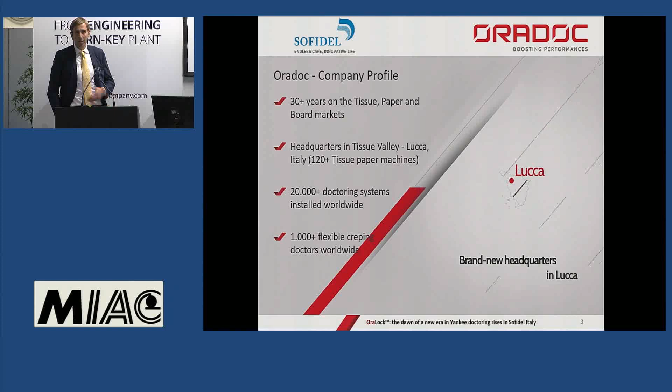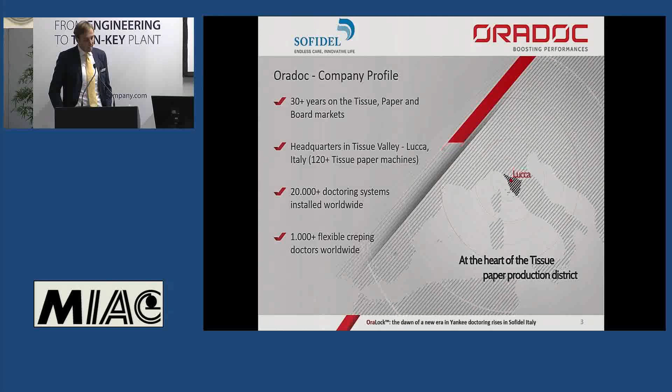Before starting, some brief information about our organization. ORADOC is part of WIVA Network, which involves two other companies, CRC and ISE, that are involved in the paper industry, providing products and services for more than 25 years. Both of these companies are based here in Lucca. Concerning ORADOC, it is headquartered nowadays in Lucca, but we also have a branch office in the north of Italy, in Novara.

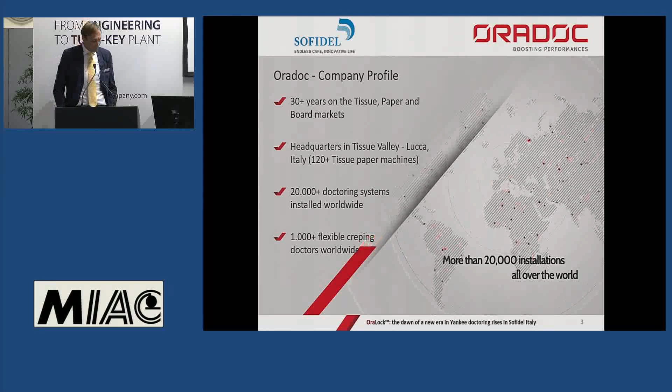For over 30 years we have represented a benchmark in the world of doctors, measuring systems, and blades for end user and OEM customers. Even though our background came from the paper industry, in the last few years we have developed and grown also in other fields like rubber, nonwovens, wood industry, and others.

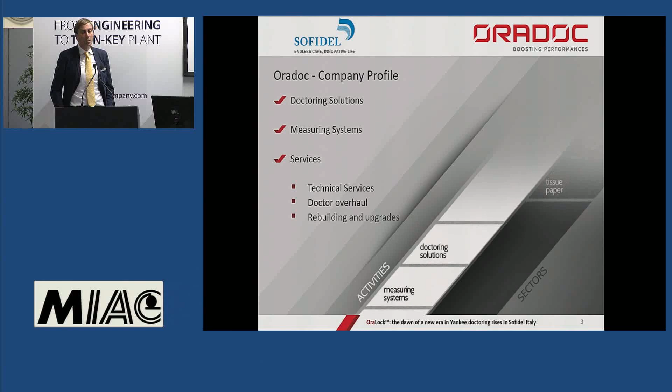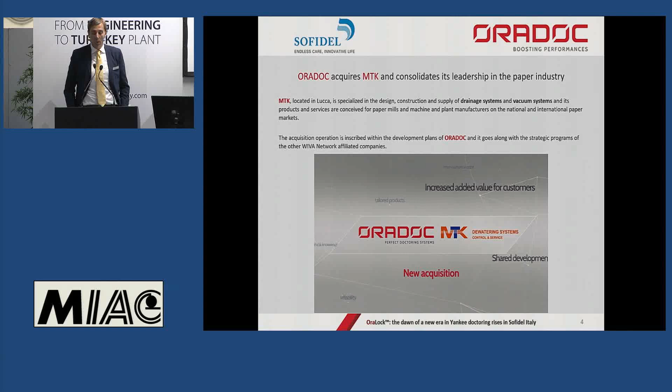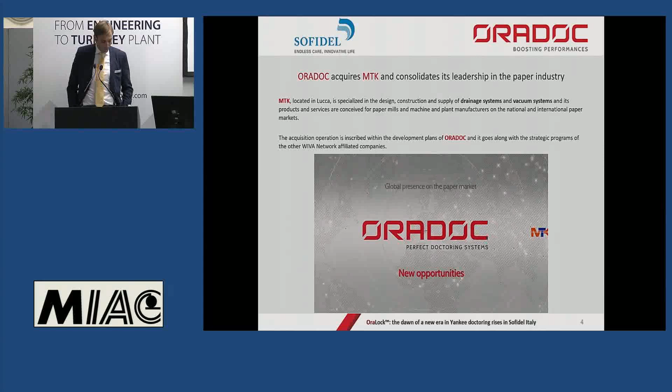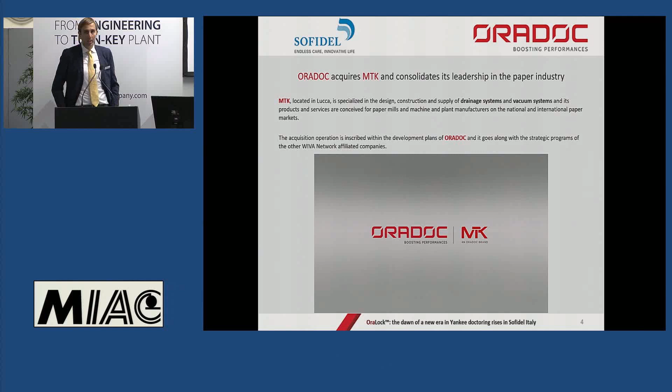This is the great news for this year about ORADOC: from the 1st of January 2021, we have acquired MTK. MTK is also an Italian company, based in Lucca, that produces and installs drainage systems and related vacuum systems for the paper industry. This acquisition is part of the strategy that we have in ORADOC for the present and for the future.

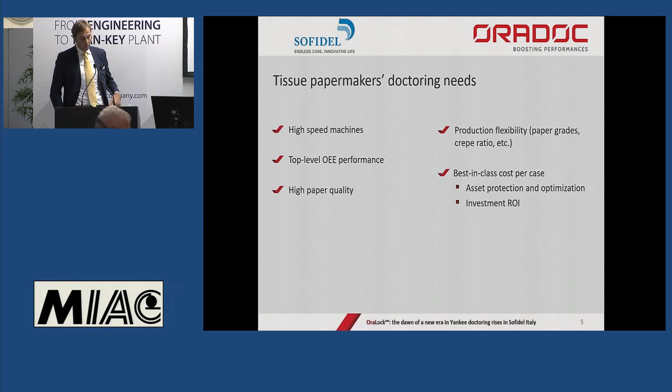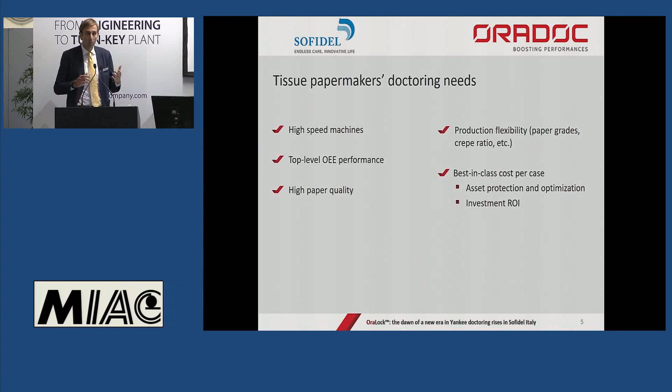Okay, let's discuss the OraLock after this brief presentation. As you know, paper makers are more or less every day challenged by the need to obtain the best possible product in terms of quality and quantity, while using high-speed machines and also differentiating the product every day according to market demand.

All of these needs cannot be achieved without a stable, flexible, and optimized creping process. The creping process is a part of the process where the creping blade holder and the other holders of the Yankee cylinder are very important.

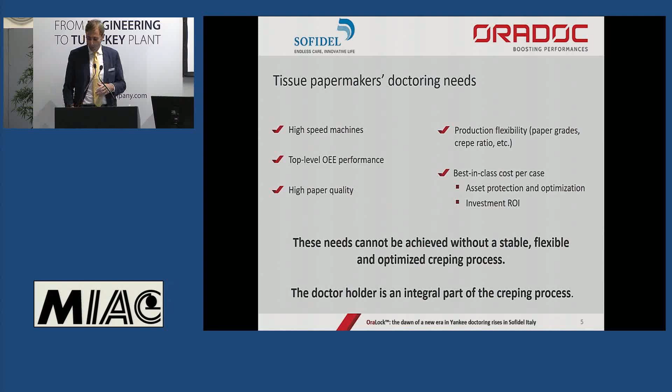So, when it comes to meeting this need, in the market we can find two different concepts of creping blade Yankee doctors: the flexible philosophy and the rigid concept.

Historically, ORADOC has always trusted the flexible concept, but our idea was to approach the rigid concept from the beginning, with some advantages over the already existing doctor. This is what we have done with this project.

This project came from our experience in the paper market and in paper mills, but also thanks to the help that our customers gave to us.

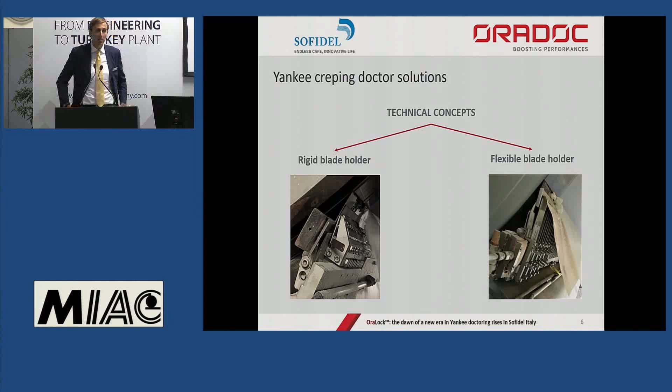The development process of this OraLock, this new doctor, came from a dedicated SWOT analysis that we performed on the existing rigid doctors found on the market.

So, starting from the strengths: we could say that what we find in the market has a robust, reliable design, and of course a cartridge system to adjust the stick-out blade.

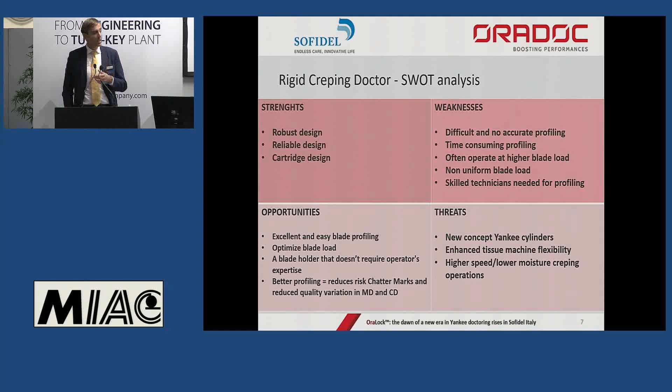On the other hand, if we look at the weaknesses of this rigid creping doctor, we could list: difficult and non-accurate profiling. For this reason, this procedure is usually carried out by a very skilled technician and also takes time. But if you don't do a very good profiling, you end up with a higher blade load in order to cover the Yankee better, and a non-uniform blade load.

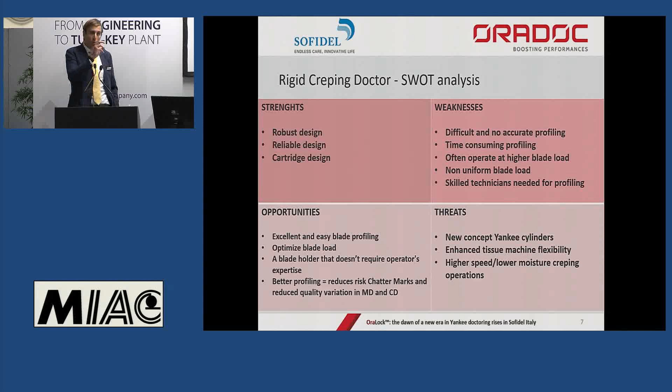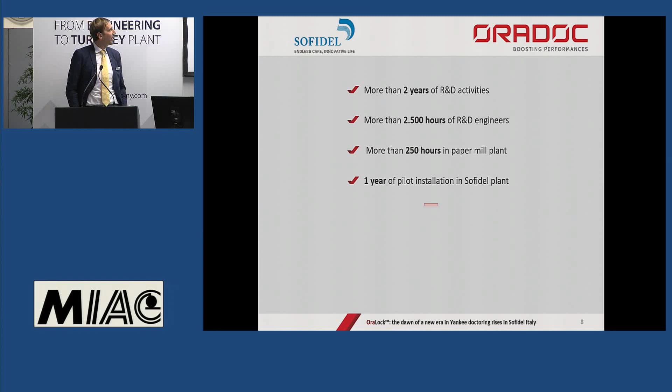For this reason, we took all these weaknesses and tried to address them in our new concept. So, following this idea, after more than 2 years of R&D activities and 1 year of pilot installation in a Sofidel plant, we have developed the new concept, with the brand name OraLock.

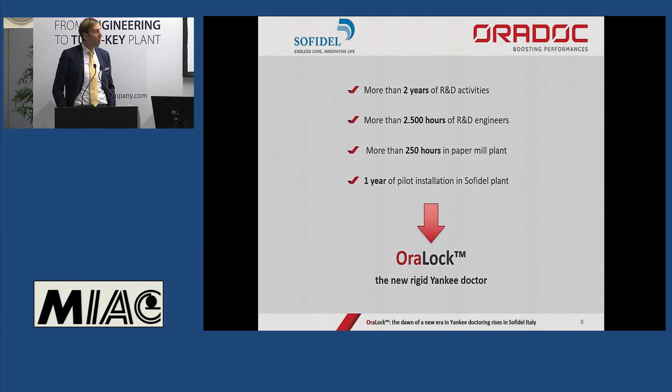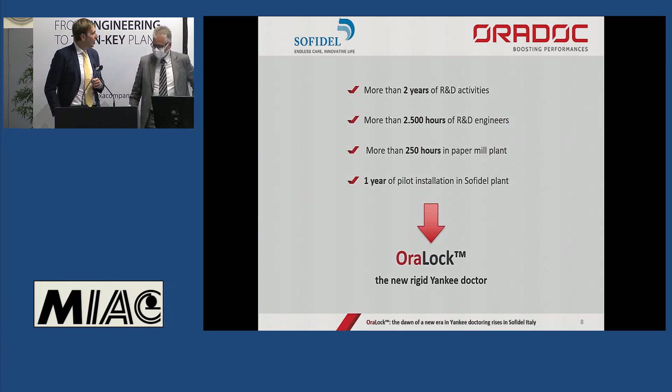So I now give the floor to Francesco Corrotti. Again, thank you for sharing the presentation with us. We will briefly explain the Sofidel group, if necessary, and also how we have approached this project together.

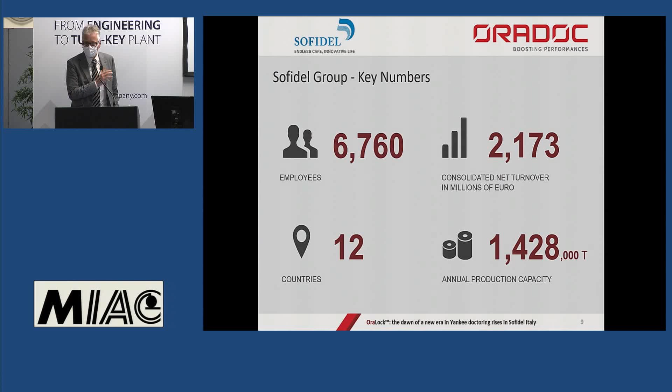Okay, just before getting into the point of this presentation, please allow me to get you bored for a couple of minutes about presenting my company, Sofidel Group.

Just a few numbers to describe. Maybe Sofidel is well known in the area and maybe in Europe, a little bit less outside Europe. However, key numbers: more than 6,000 employees, with a consolidated net turnover of over 2 billion. We have facilities in 12 countries, with an annual production capacity of our paper mills of about 1.5 million at the moment.

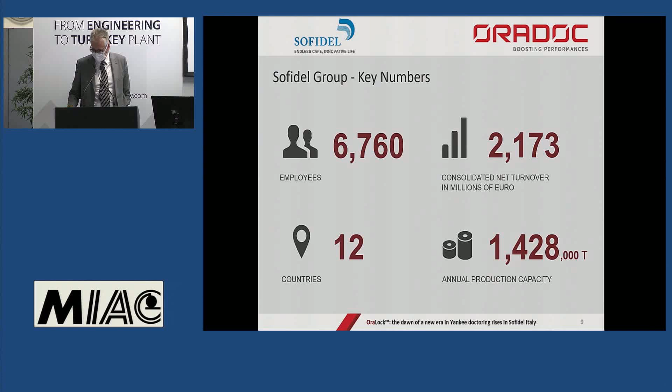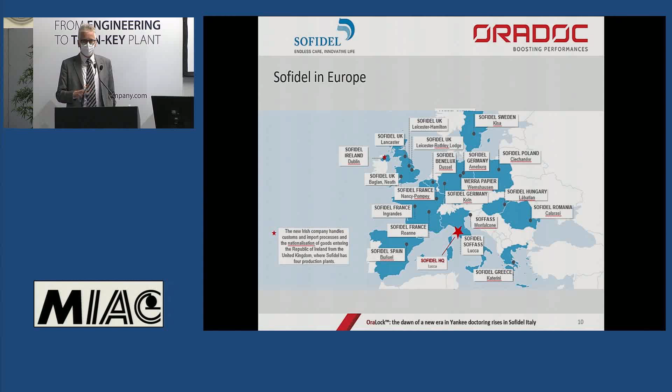The story of Sofidel is quite young, because it's a company that was founded about 50 years ago. But in these 50 years we have seen continuous growth from Italy, consolidating in the Italian market, with the creation of the Regina brand in the late 80s, and after that the challenge of expansion in Europe via greenfields and via acquisitions.

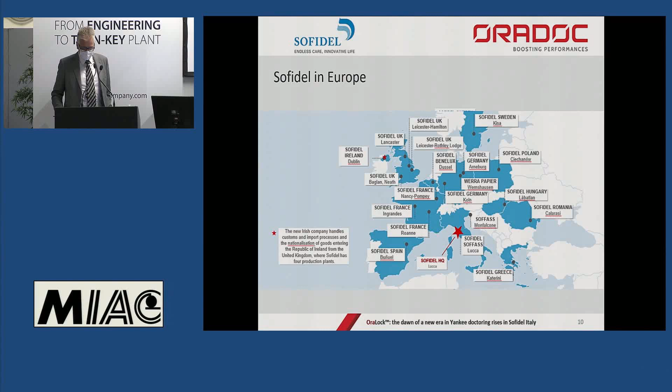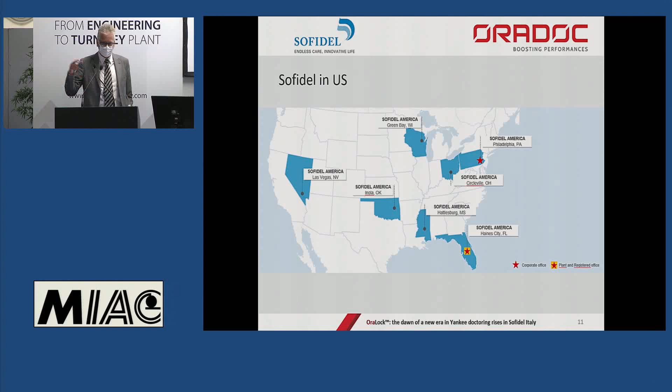So once Europe was covered, we put another brick in our history, stepping on the other side of the pond in the US from 2013, and we have a growth strategy in the US that is ongoing. Now we are starting covering the US also. We have a headquarters in Philadelphia with some facilities spread all over the country, and the strategy is to grow more in the US.

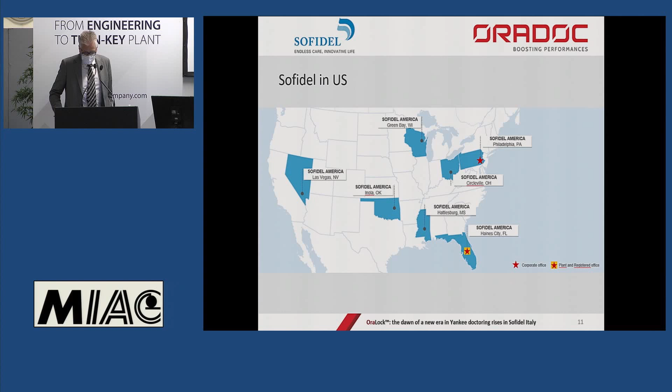Just a short mention about what is leading, what is impacting on our business, our way of doing business.

Sofidel has been committed for a decade to sustainability and the environment, maybe in a pioneering way, because in tissue no one was speaking about environment maybe 10 years ago. Maybe Sofidel did it in the tissue industry for the first time. In this decade we have seen the joining with the WWF, so a lot of commitment about CO2 emission reduction, and also the other pillar for us is social responsibility, which is a big and important pillar driving our business.

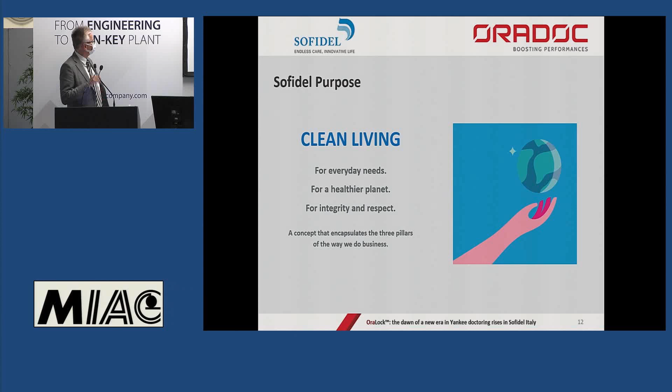So this is the last motto that overcomes sustainability, that we have identified in Clean Living, the best description of our way of doing business: for everyday needs, a healthier planet, and integrity and respect.

So now after this, I would like to jump into the project with ORADOC itself. Basically, this discussion with ORADOC, due to the long-term relationship and mutual trust between Sofidel and ORADOC, and also a personal interest in the concept of OraLock when they started mentioning it to me, at the end we were really interested to do something together, at least to give mutual help in developing this concept.

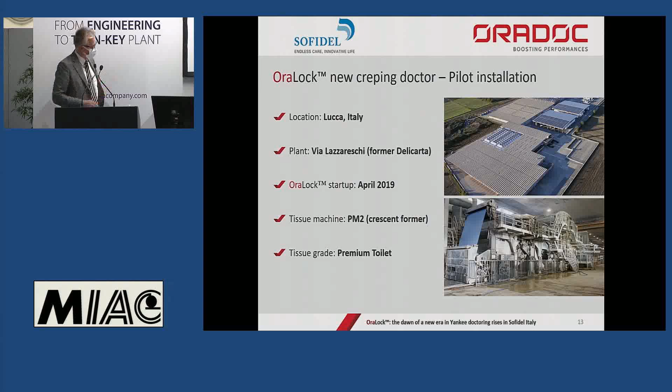So at the end of the day, we identified one mill, PM2 in Lucca, in the area here in Porcari. In April 2019, we started up with this new system that was developed specifically for that machine. This is a crescent former running 1,800 meters per minute, producing premium toilet paper. So I leave the word again to Maurizio to go on with the description.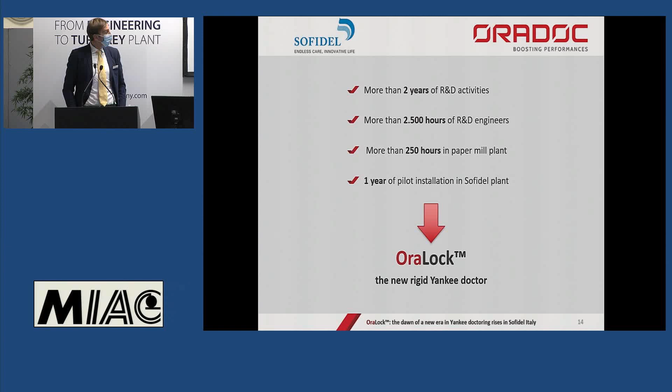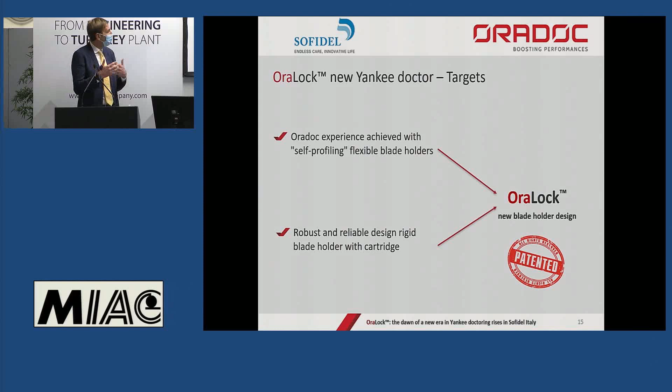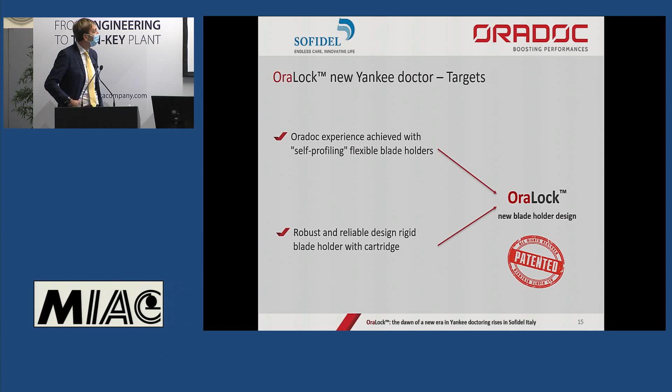So the concept is mainly based on some movable parts that we call fingers that are flexible. This is the flexibility of these parts during the profiling setup, and this is why we call it OraLock. We lock all these movable parts after the profiling setup. So it means that this is a rigid doctor when running and flexible during the setup. And the main important thing is that we achieve this in a very easy and quick way, without the expertise of a skilled technician.

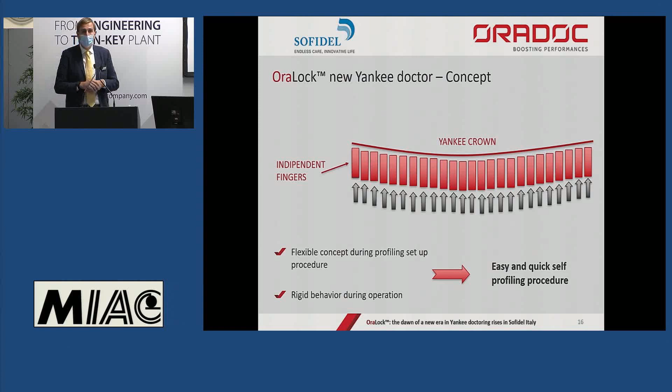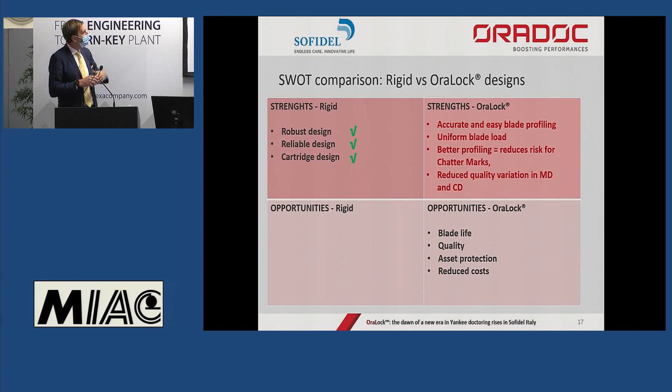Coming back to the initial SWOT analysis, we have maintained the strengths of the existing rigid doctor - the robust and reliable design, the cartridge system to adjust the stick out - and we have transformed the opportunities of the existing rigid design into additional strengths on the OraLock system. So, an accurate and easy blade profiling without the need of a skilled technician. This means a uniform blade load, better profiling, reduction of the risk of chattering, and also reduction of variation in paper quality in machine direction and cross direction. This is what we have achieved with this project.

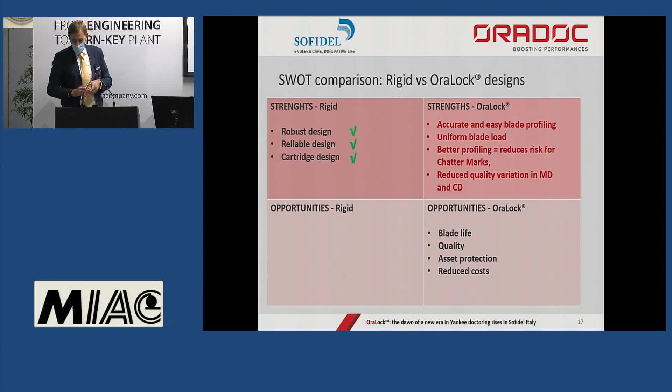So I leave now a very short clip about this project and its relation with Sofidel.

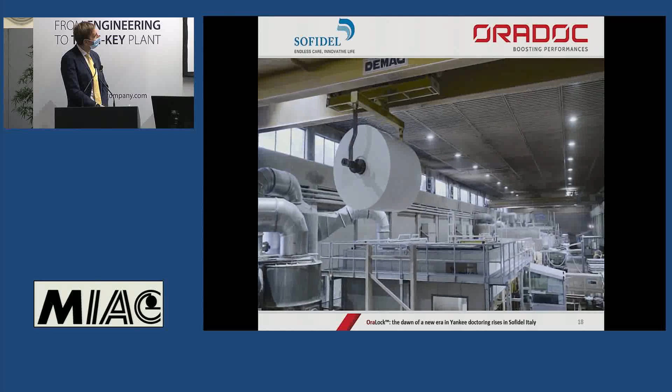I give back the floor to Francesco, who will explain the results of this project.

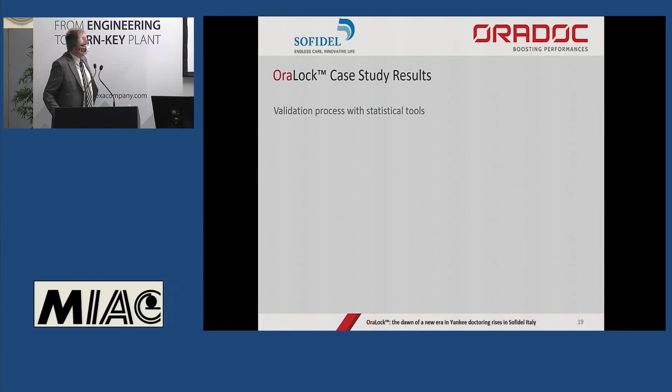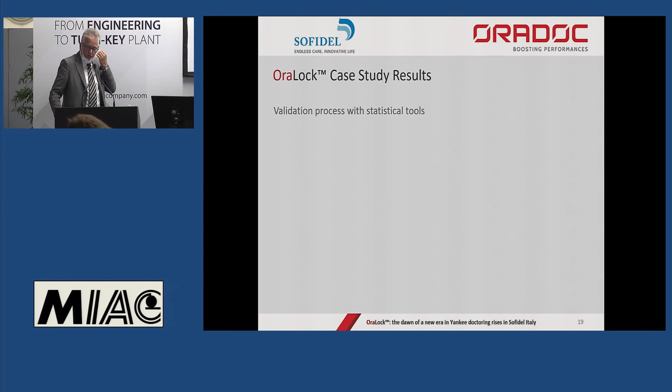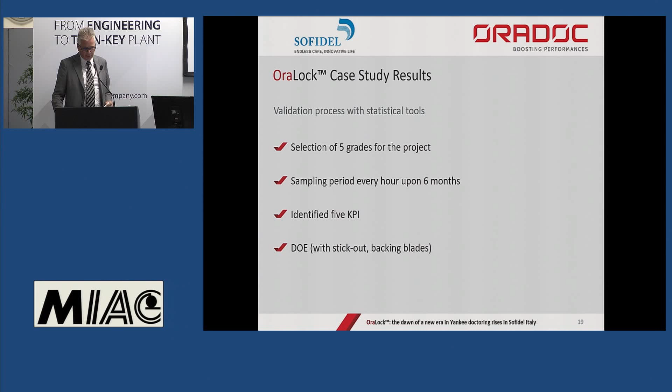Okay, just a quick review of the figures that we have identified. So we have set a validation process with statistical tools, and we have selected some grades of paper, and we have analyzed the figures over a period of 6 months. We have also identified 5 KPIs, and at the end of the day, all of the KPIs were reached and achieved.

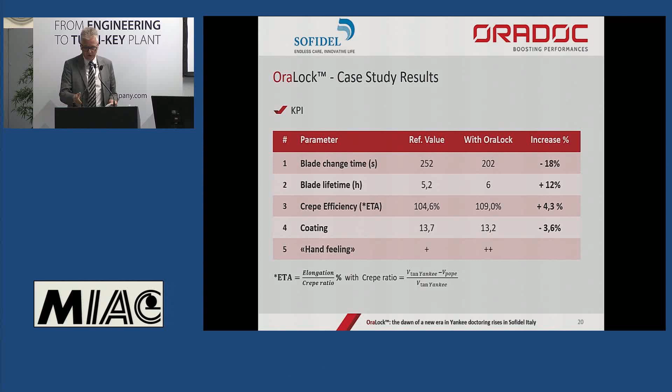First of all, the blade change time compared to the previous creping doctor - we have seen a better, quicker way to change the blade, saving about 18% of the time during the blade change. We have also seen a better lifetime, more than 10% improvement. We have defined a parameter that is elongation divided by crepe ratio, and we have seen an increase of 4%, with a slight reduction in coating coverage as a side effect.

And then we have also seen a better hand feeling. It is not proven by any Emtec testing or similar, but this has been assessed through an internal panel.

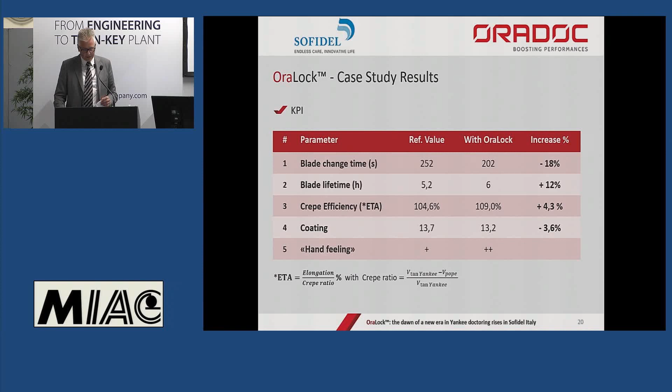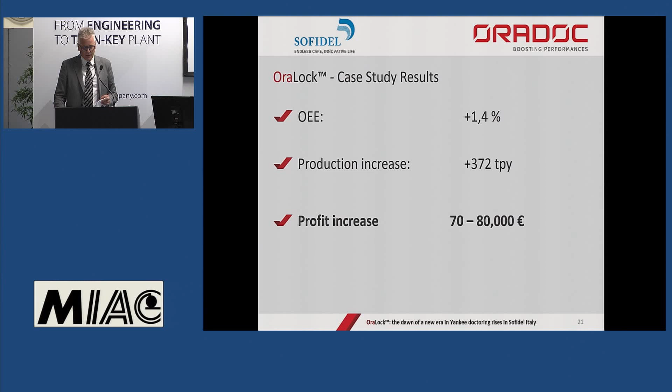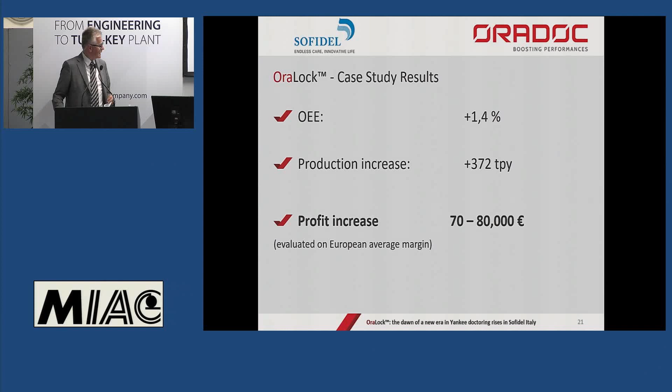So at the end of the day, we have also increased the OEE, overall equipment effectiveness, by 1.4%, and we have quantified this as 372 tons per year on that machine specifically. To put some euros on that, about 80,000 in earnings. Please consider that these results come from 6 months of continuous monitoring, thanks also to the team at the Liccarta mill that did a very great job on that.

So at the end of the day, the goals were achieved, and I would like to insist on the quick and fast profiling, because this new idea of OraLock has been proven effective. Maybe it is not so ideal in Lucca, where we have skilled technicians with the capability to do that, but it is important that it is possible to do regardless of operators' expertise. So at the end of the day, it is more valuable in a paper machine that is quite far from Lucca or in the middle of nowhere with no skill at all.

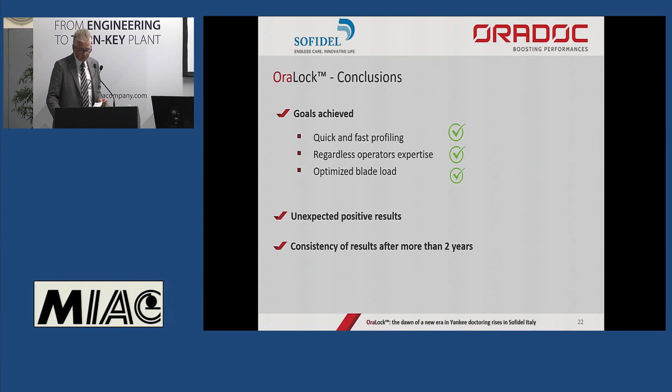And then we have optimized the blade load, because having the possibility to profile the creping doctor more frequently, it is possible to have a better profile throughout operation. So at the end of the day, I close here - the equipment has been working since April 2019 without any major issues.

So thank you for your attention. I don't know if there are some questions or... Yeah, if there is any question, otherwise I would really thank you.

Any question? No, but thank you especially for introducing to us this new company. How do you call it? Oradoc. Okay, it's a company, but...